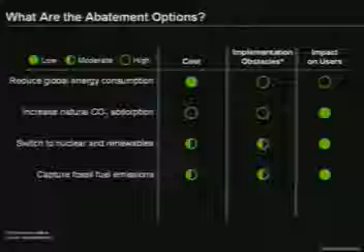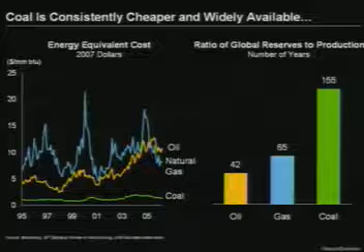The third thing we look at, and probably the biggest investment opportunity and most critical for us globally to contend with, is capturing fossil fuel emissions. The reason is simple: in terms of energy equivalent costs, oil and gas are far more expensive than coal, and there are far more known or proven reserves of coal than gas or oil. The other thing about coal is it's on site.

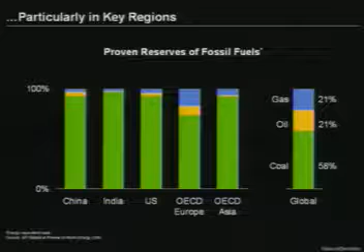It's where so much of industry is settled around the globe. So there are very large and sizable reserves and seams of coal in the US, China, India, Europe, etc. So it's available, it's cheap, it's plentiful, and it's basically where we need it.

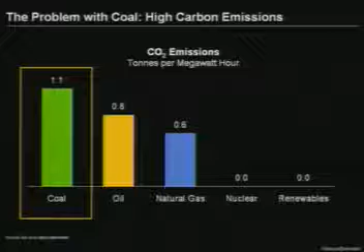But the single problem with coal, of course, is the high carbon emission associated with burning it as a fossil fuel. Relative to oil, natural gas, and other renewables, coal is the culprit.

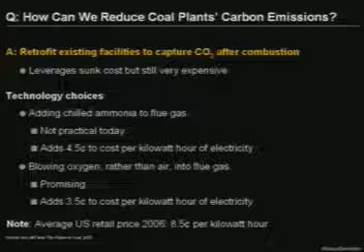Going forward, there are a few opportunities we have. One is to retrofit existing facilities to capture CO2 emissions. Once you've burned the coal, you take the CO2 out of the emissions, which can be done by adding chilled ammonia to the flue emissions, or by blowing pure oxygen rather than air into flue gas. These are known technologies, and the benefit is retrofitting existing plants, but it's a relatively high cost of carbon capture.

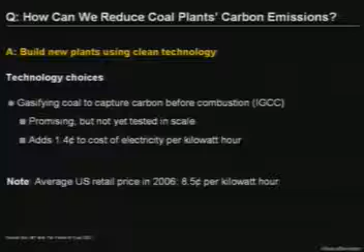The other option is to build new plants using cleaner technologies, where the coal is gasified, so you extract burnable gas, the natural methane gas, from the coal, and you extract the CO2.

We think coal is going to continue to anchor the power fleet going forward. Approximately, coal-powered plants over the next 25 years are going to grow about 60 to 70 percent in terms of kilowatt output.

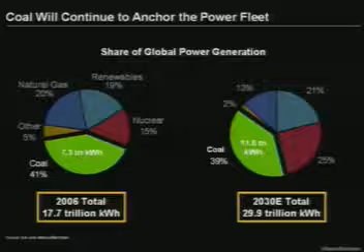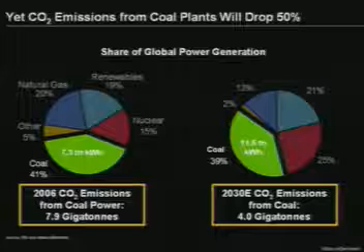But if we apply known technologies, we can reduce the carbon outputs associated with this. This is very meaningful, and it's something being addressed now and that must be done. With the application of appropriate regulation going forward, this can be achieved.

The issue with taking CO2 out of coal is that you still have CO2, and you've got to do something with it. CO2 is a gas, so effectively it has to be pumped, or stored, and there are three possible options.

One is basically to pump it into depleted coal mines or oil facilities which have been depleted, and seal those. The known and proven space to do that is about 80 years of peak capacity, so we have plenty of opportunity to go back out to the North Sea, or to coal mines in the UK or US, and just pump it back into the ground, seal it, and let it be.

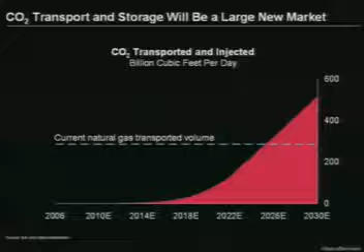The other two options are to pump it into saline aquifers in the substrata, which gives you bubbly salt water that's of no use to anyone but is effectively safe. The third is to pump it into the deep sea, where the pressure of seawater would liquefy the CO2, but that's environmentally challenging because adding CO2 into seawater tends to raise its acidity, so I think environmentally that's probably a no-go.

So we think we're more likely to see the piping of gasified CO2 into disused caverns that were once coal mines or oil fields. The incremental spend coming through from pipelines and this expenditure is considerable.

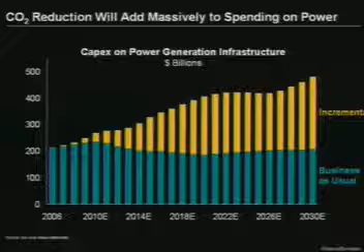This is just a picture overall of where we see the incremental spend across coal, nuclear, and renewables over the next few years. This is a multi-trillion-dollar project over the next 20 years, probably an additional spend of about $5 trillion, so this is going to flow down across a wide variety of industries in a very meaningful way.

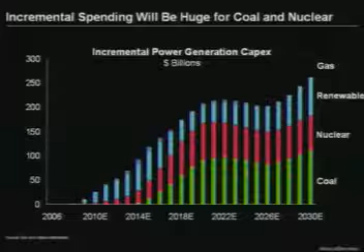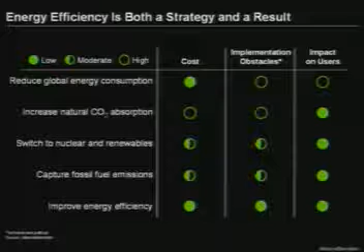I want to cover one last slide, because this gets into something I think is interesting, perhaps very interesting to you in the public domain: improving energy efficiency. It's a small example, but I think it shows meaningfully that the best way to approach some of these things is by being a little bit smarter and applying known technologies.

So it's not that we shouldn't be building wind farms, but the point is we can all do things more effectively. We can be more efficient if we act smart, act fast, and get meaningful outputs.